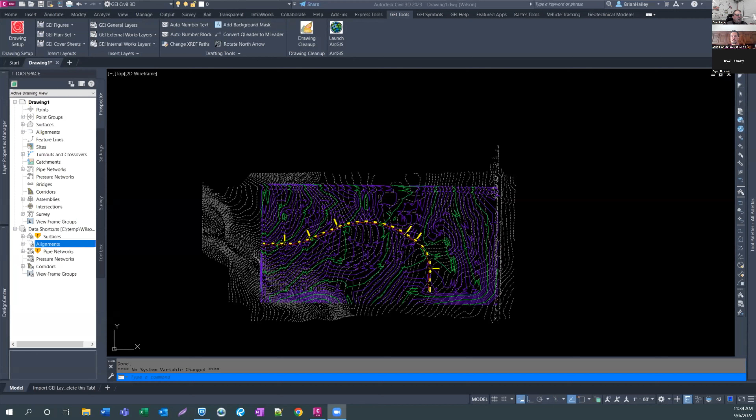Exactly. All right, so I'm going to start off doing a little tips and tricks type of thing, and this gives you an opportunity to post questions up so that we have something to answer. So here, this is kind of a combination AutoCAD and Civil 3D tip. As I'm working in this drawing, as I hold my mouse and it just sits still, I get this beautiful, fantastic pop-up right in the middle of my drawing that typically falls right on top of whatever thing I'm trying to look at.

So this is known as a rollover tooltip. I despise rollover tooltips, I really never use them. I don't know if anybody else tends to use them, but they just take up a lot of space and show up on top of my drawing, and it's annoying. So that's one of the things that'll pop up on top of your drawing.

Another thing that'll pop up on top of your drawing is the Civil 3D tooltips. All right, why didn't you work? Come on, let's go. So if you're now on top of an object, you'll get the Civil 3D tooltip. This will give you things like the elevations of your surfaces, the station offset of alignments, or station elevations and profiles, things like that. I find this to be helpful sometimes, but not always. Another thing that will pop up is if you select something.

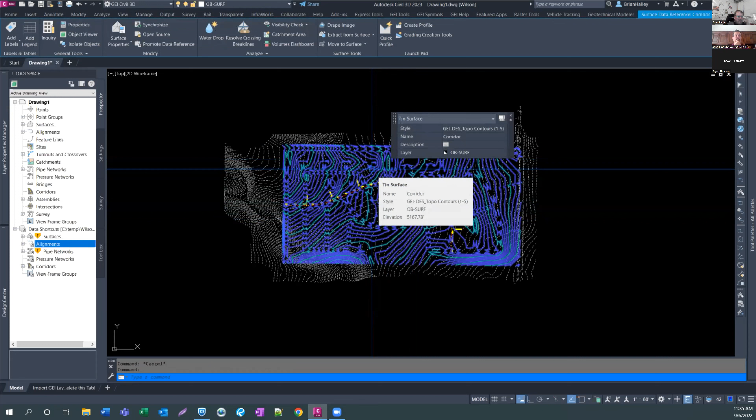You'll get your quick properties. I have a love-hate relationship with quick properties, I love and hate them at the same time. But I'm going to show you how to change some of these settings to hopefully make these a little bit more beneficial.

The last thing that tends to pop up is your dynamic input. If I start typing and type L for line, you can see this thing pops up in the middle of my screen. So I'm going to show you some things you can change to make these a little bit more useful and less annoying.

The first one is those rollover tooltips, this garbage here. I hate this, I hate it with a passion. I never ever want to see these things. They always pop up and they're always in the way.

If you go into your options, I just type OP for options, and of course it always shows up on my other screen, underneath all the Zoom stuff, because I only have one screen since my docking station is dead. Go to the display tab in your options, and you can turn off the rollover tooltips.

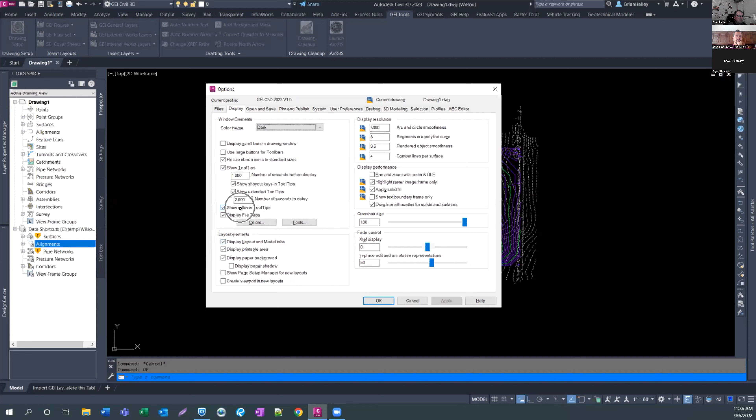I select OK, and now as I mouse over something, I don't get that AutoCAD rollover tooltip. I still get the Civil 3D stuff, which I think is good in some situations, but I don't have to deal with that big white box right in the middle of my screen constantly. So that's the AutoCAD rollover tooltips.

So let's talk about the Civil 3D tooltips now. How can you control the display of these? The nice thing is you can control them at several different levels. One, you can turn them off completely. Two, you can turn them off for all things of a certain type. Or three, you can turn them off for certain objects.

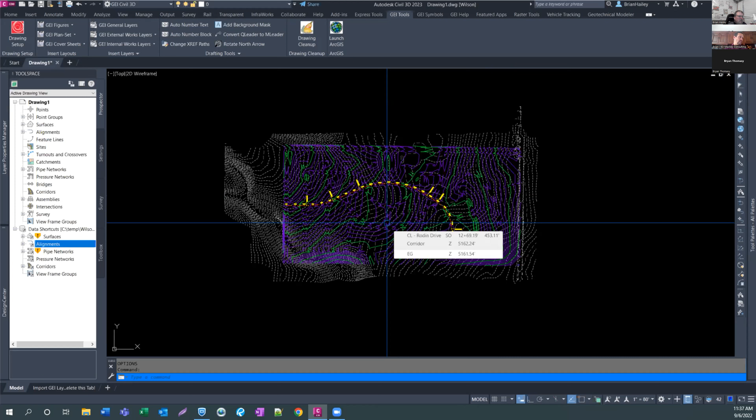Right now I've got two surfaces in here - that corridor surface and the existing ground surface. I'm not interested in any of the elevations for the existing ground, so I want to turn just those tooltips off. The way you do this is you go into the properties of that object - I select the object, then go into the surface properties, or alignment properties, or whatever properties it was.

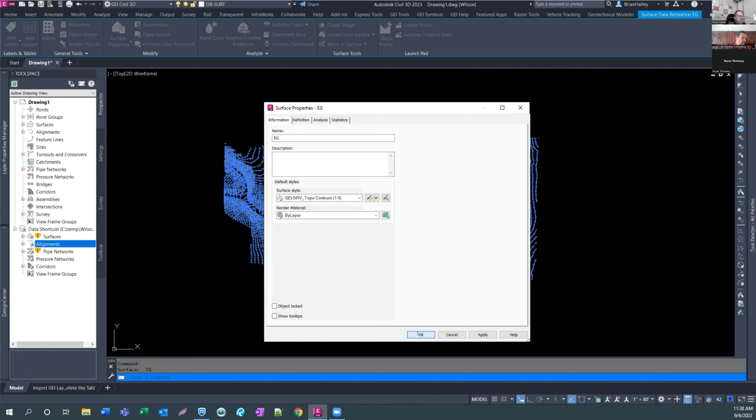On the information tab down at the bottom, you can simply uncheck show tooltips. When I uncheck that, I now only get tooltips for the one surface and not the other. So you can do it individually for individual objects.

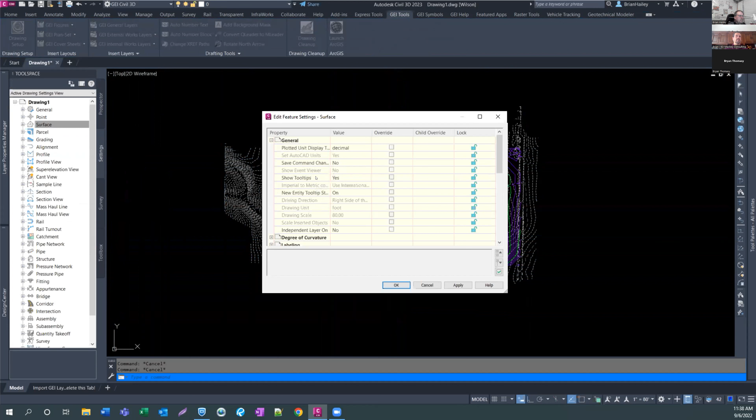You can also do it for all surfaces or all alignments, through the settings tab, right-clicking on the feature. In this case I'm going to do this for surfaces, so I'll right-click on surface and edit the feature settings - again this is under the settings tab. I'll pull this over, and I believe it's under general, if I remember correctly, show tooltips. I can go into my surface settings and say no, I don't want to see the tooltips.

Now, this is specific for this drawing, not a user setting like the rollover tooltips are in CAD - it's specific to this drawing. So if I choose OK now, you'll notice I don't get any tooltips at all.

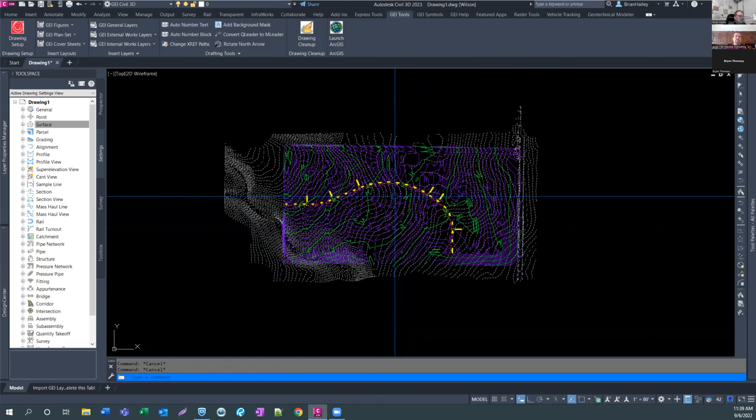Let's try that again - come on, I should at least be getting the alignments. Why am I not getting my alignments? Interesting. You had it for a split second there. Huh, I should still be - there it goes. I don't know why it was taking so long, but as you can see, I don't get any of the surfaces now, but I do still get the alignments.

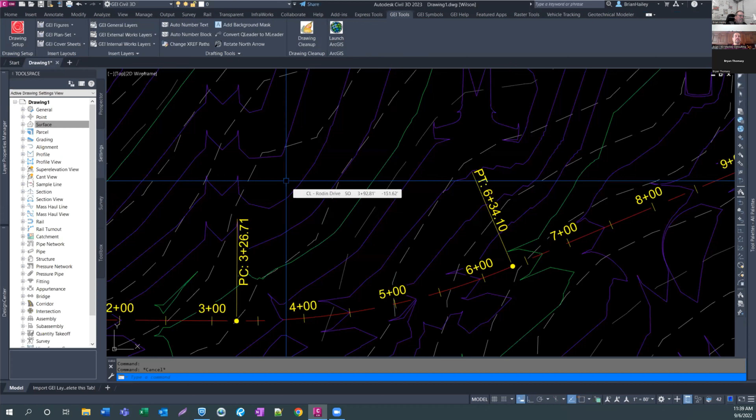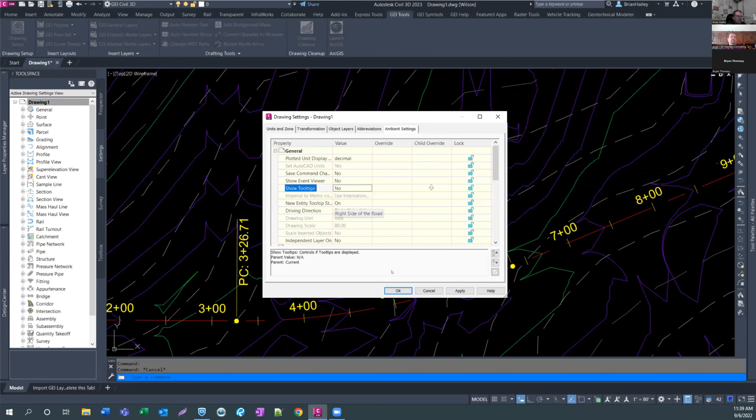Finally, you can turn it off for the entire drawing by right-clicking on the drawing name, edit drawing settings, and then on the ambient settings tab, you can expand out general and show tooltips. This will turn it off for everything in your drawing - you will never see another tooltip in Civil 3D again. So I'm not going to see any surfaces, alignments, profiles, nothing.

Is that for Civil 3D or just for this drawing? That's just for this drawing - this is the drawing settings, so it's specific to this drawing, and it's not specific to the user.

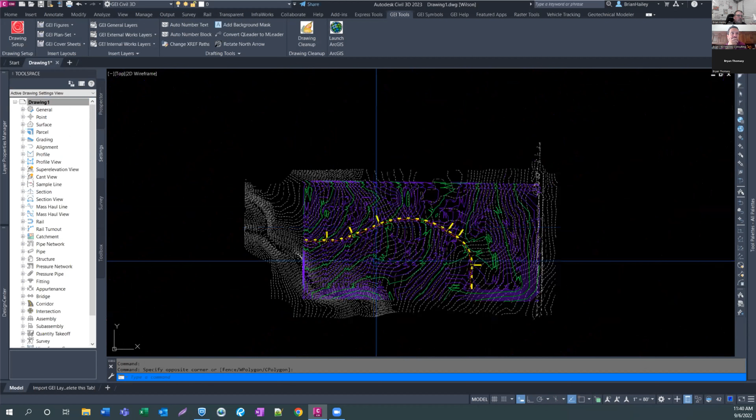It's specific to the drawing, so nobody will see them in this drawing. That's something to be aware of when you go in and change those things.

All right, so that's the rollover tooltips. That's the Civil 3D tooltips.

Let's talk about the quick properties now. So if I select something, I get this big thing that pops up. Now, when quick properties first came out, I was like, oh, this thing is evil. And I'm sure there's a lot of people out there that would think the same thing.

I'm guessing, Brian, you're not a big fan of the quick properties, right? Assuming you're talking the other Brian, despise, loathe, and hate are three of the words that come up with the quick properties. That and running O snaps, but I'll just leave myself out of this.

I'm not, I hate the way they work this way, but I think the quick properties are very beneficial. The thing I hate about them is when I pick on them, they always pop up right there in the middle of the screen.

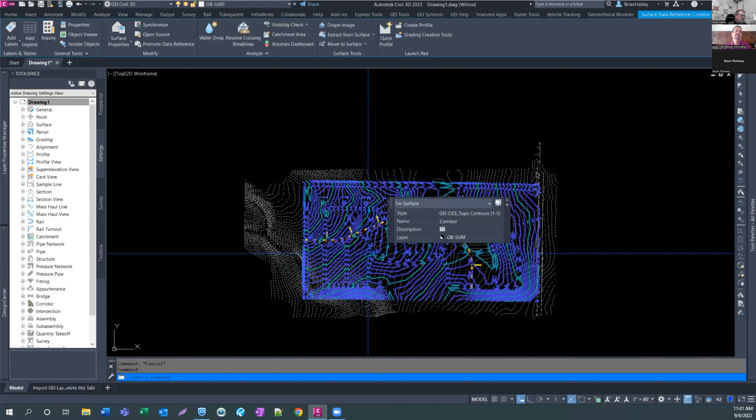Now I can move them out of the way. Let me go ahead and put them over there. But when I pick something again, it's back in the middle of my screen.

However, we can change that behavior. So just below the little X on your quick properties, you can go under the options for your quick properties. And in your options, you can go to location mode and make it static. So now when I move this up here to the top left of my drawing area, the next time I pick something, it's still up there at the top left of my drawing area.

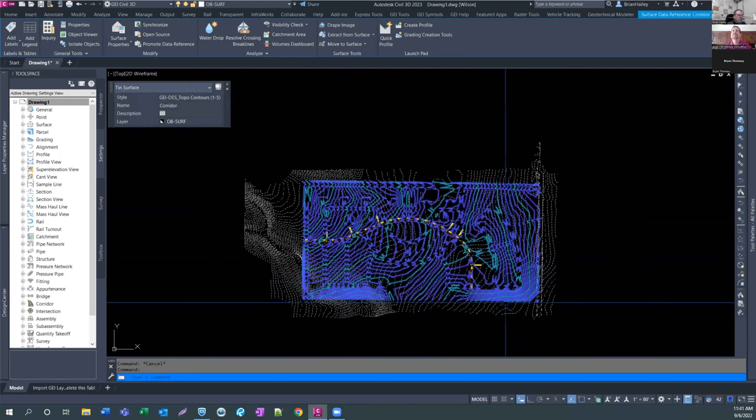So no matter what I pick, it's going to be up there in the top left, and I can change those properties. Another nice thing about the quick properties is you can control what properties are being displayed. So if I just draw, say for example, a line here, and I select it, in my quick properties I can hit the options again and customize it.

For all these different things, I bet it's going to show up on my... oh, it showed up here. Cool. So for my line, here are all the properties I can display. Maybe I'm really interested in the starting and ending elevations for my lines, so I can toggle on the start Z and the end Z values.

Apparently I can't do that because that's the enterprise CUI that I was trying to edit.

I, as a person who imports in spaghetti drawings from civil engineers all the time, I wish quick properties with the Z elevation would be there for every single one of the files you guys put out. Yeah, then maybe I wouldn't get such spaghetti drawings.

So apparently it's not going to work because this is under my partial. Do I have it under here as well? If I go into my custom, see, I should have tested that before. Okay, so if you're not using an enterprise CUI, you should be able to edit that and change what properties you see up there. But at least it's out of the way now, so got that going for us, which is cool.

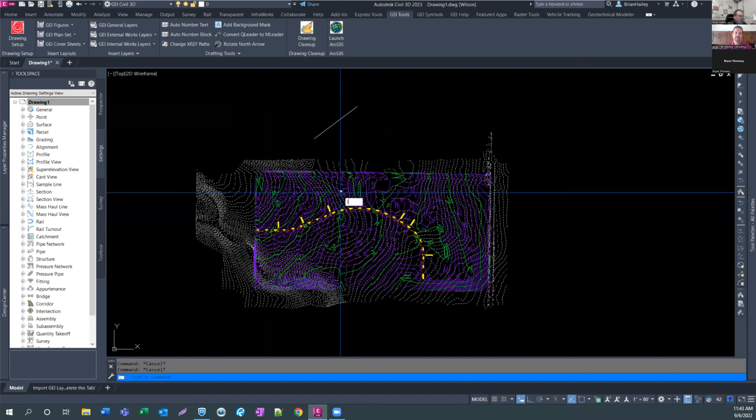I left it on for at least 5 minutes before I started Googling on how to turn this stupid thing off. The problem I had is if I had my cursor up here in the top right of my drawing, and as I'm moving my mouse towards the bottom left, because that's where I need to go draw something, as I'm moving the cursor, as I type, my cursor froze and would freeze right there.

And now I'm thinking, okay, did I type this correctly or not? And this was before the autocomplete thing, right? So I'd have to go search my screen for where my cursor was when I stopped typing. And if you're in a busy drawing, it could be difficult to find.

So what we can do is go into your drafting settings, DS for drafting settings, and we have the dynamic input tab. One thing I always like to do is change it so that the input is down at the command line, so show command prompting and command input near the crosshair.

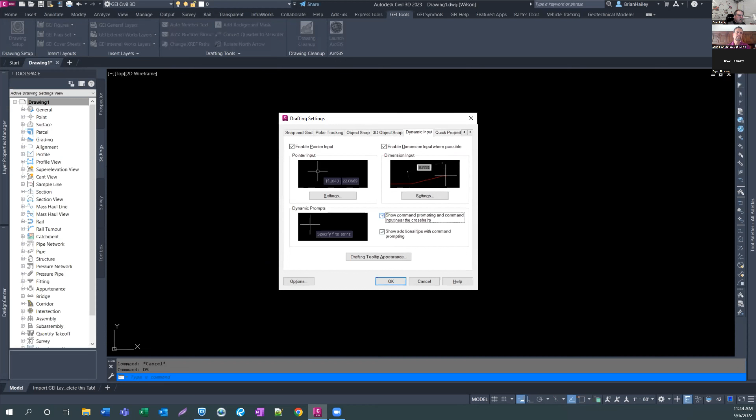So I'm going to uncheck that, select OK. And now as I move my mouse and I type L, it's showing up down there at the command line, the way God intended it to be, right?

So now I can type line down there and it's showing up at the command line. I'm not getting the prompts near my cursor. So that was one of the things I always despised about the dynamic input, but being able to make that change, I found I really do like the dynamic input. I didn't intend for that to happen.

What's that? You said God intended. I didn't intend for it. You didn't intend for it.

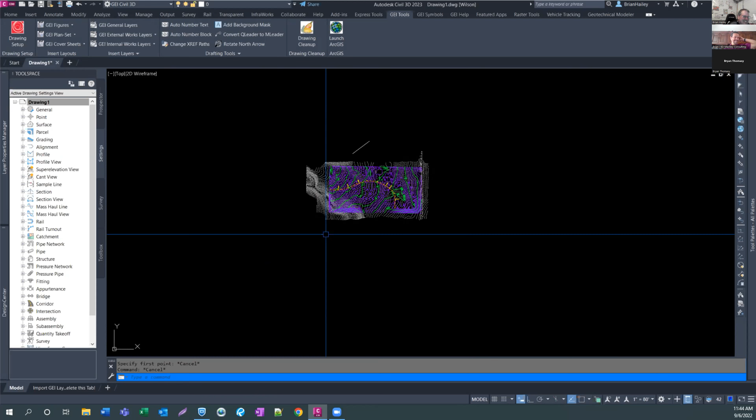So if you're not using your dynamic input, I would recommend trying it again with that setting changed, because that's the primary reason I see most people try to turn it off. But being able to select this and just type in, tabbing over to the total distance and changing that to 1,000 and just seeing your line change is really great. Being able to mouse over the grip of a line and seeing all that information, I really enjoy that.

Another thing I just thought of, I wasn't planning on talking about it, is the multifunction grips. So let me draw a polyline here because that'll show up a little bit better. If I mouse over this, I get the stretch vertex, add vertex, remove vertex, and so you can come down here and choose these different options.

But did you know that if you select the grip, that will take you into the first of your multifunction grip options. And if you hit the control key, it'll cycle you through those options. So now I'm adding a vertex. I hit control again, I'm now removing the vertex. I hit control again, it takes me back to the beginning where I'm stretching.

Same thing if I go over the arc. If I grab it, or the line, I grab it, I'm stretching it. I hit control, I'm adding a vertex. I hit control again, I'm converting it into an arc. I hit control again, and I'm back to stretching the line.

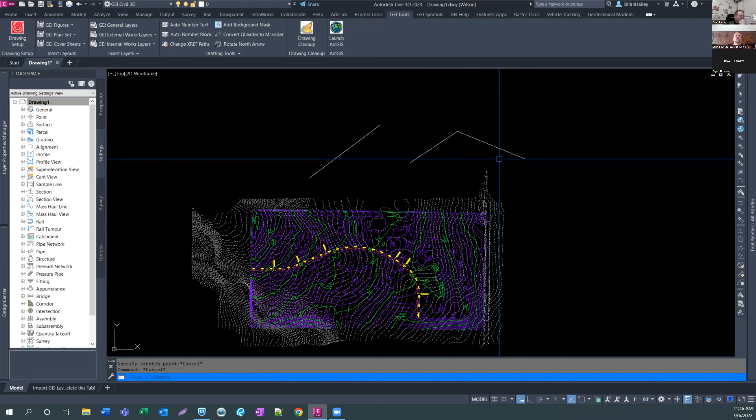So if you are really familiar with the way multifunction grips work, you can actually go in and turn off the display of the multifunction grips on your lines. Because if you have a drawing full of polylines that have contours on it, what happens all the time is you go in and grab an object and your mouse ends up on top of it and you go, hey, I want to erase it. Oops, I moved my mouse.

Your mouse ends up on top of it and you go E for erase and you hit enter. Well, it says, hey, there is no multifunction grip option that starts with E. And so it doesn't erase it. Even though I didn't select the grip because my mouse was over it, it popped that up.

And that is, where is that setting? Is it in your options, or is it in the drafting settings? I think it's in the options. Do you remember where this one is, Brian? No, actually, I have not utilized that.

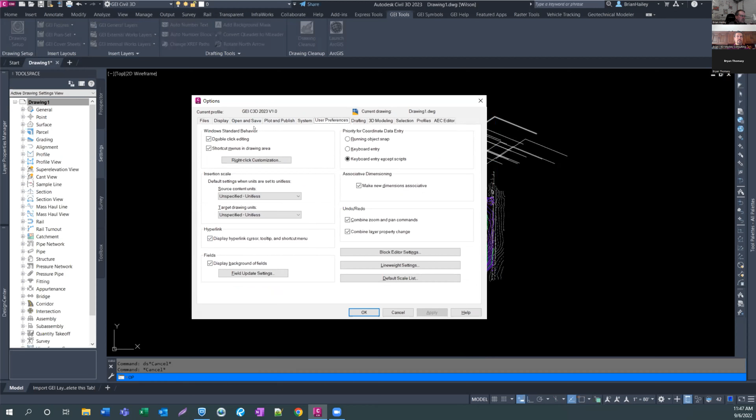I've been plagued with that for an eternity, in the fact that I constantly do that to erase, and it's actually hovering over. User preferences. If any place I would think would be under selection, perhaps, but that's just me. To be able to denote what it is selected. Under grips, show dynamic grip menu.

There it is, I bet that's it. So now when I mouse over it, I don't get the grip, but if I select it and do my control, I still get the options for the dynamic, or the multifunction grips.

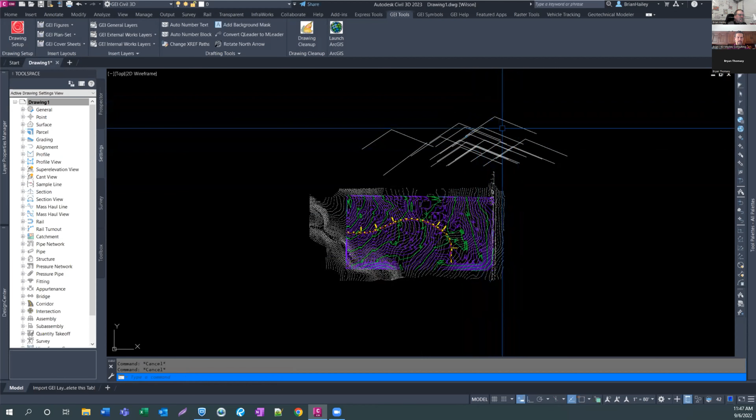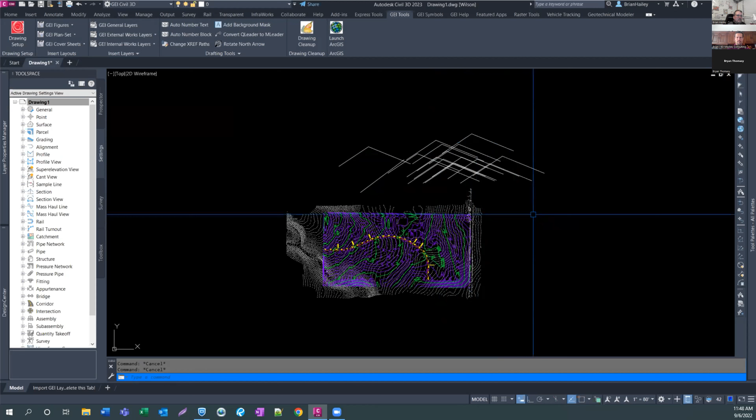I did not know you could do the control. That is fantastic. I did know that you could do the tab, so that way you could tabulate through if you're stretching, rotating, scaling, or moving. So the space, yeah excuse me. Yep, yeah, that's cool too. Learn something every day. Yeah. And if you're not careful.

So that's kind of all the introductory stuff I had. So that took up about 15 minutes or so. Do we have any questions?

Well, I can save Tom's comment, but that'll probably end up being a nice big argument with everybody about how they hate that feature. So we'll go to Charlie's question first. Charlie's question was, is there a better way than using tooltips to check the elevation on surfaces, stations, etc., alignments, profiles, all that fun stuff?

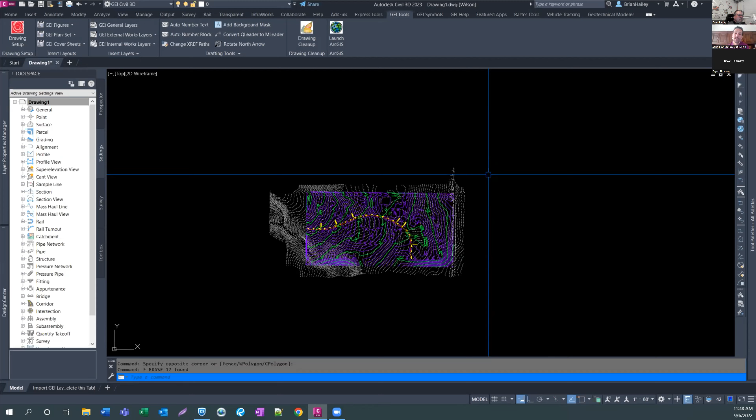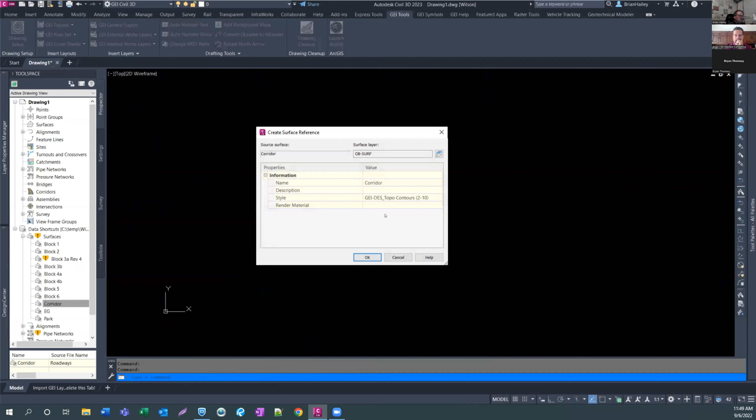So there's a couple of ways. One is the tooltips. Let me... that was too far back. I just undid everything, I shouldn't have done that. Let me bring my surfaces back in. It was the corridor surface and the existing ground. And I'll grab an alignment, we'll do that same one.

All right, so I didn't deal with styles and whatnot. So one is the tooltips. If I just hold my mouse, it shows me the station elevation or the station offset for an alignment. It would do station elevation in a profile view, elevations of surface. That's the way I would do it, especially if you turn off those rollover tooltips, and that way it doesn't suppress this.

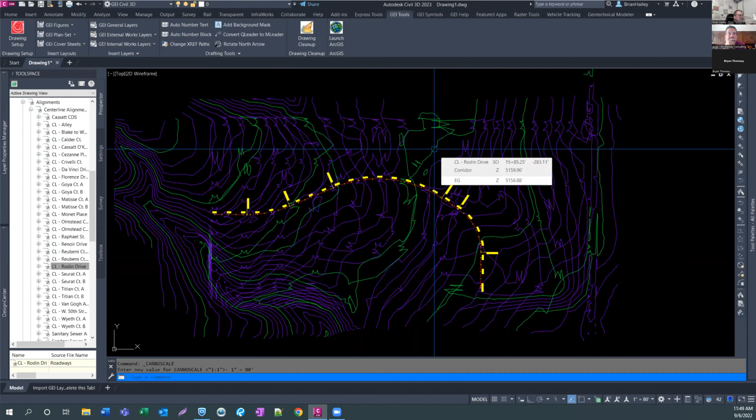Another thing you could do is if you go to the Analyze tab, over towards the right, we have the Inquiry tool. This will bring up a nice little palette for you. Of course, it's up on my other screen, just like everything else.

I'm sure I've told this tip before. If you're trying to get a palette to go on top of another palette, hold the control key and it prevents it from docking temporarily. Or if you never want it to dock, go into the properties and uncheck allow docking, and then it just won't. So, not holding the control key now.

Anyways, so we got all sorts of different types of things. If you're looking for the station offset of an alignment, you can go to Alignment, Station Offset. Let me make this a little bit bigger. All right, Alignment, Station, and Offset at Point. It's going to ask for the point, so I can just click this little button here, pick a point, and it tells me all that information.

All right, you can do the same thing for a surface. If I go to Surface Elevation and Grade at Point, again I select the surface - I'll do it for the existing ground. And then I pick the point and it tells me what the elevation is there, and it gives all sorts of great information as well. So those are some other tools that you have.

The third method that I have is simply throwing a label in.

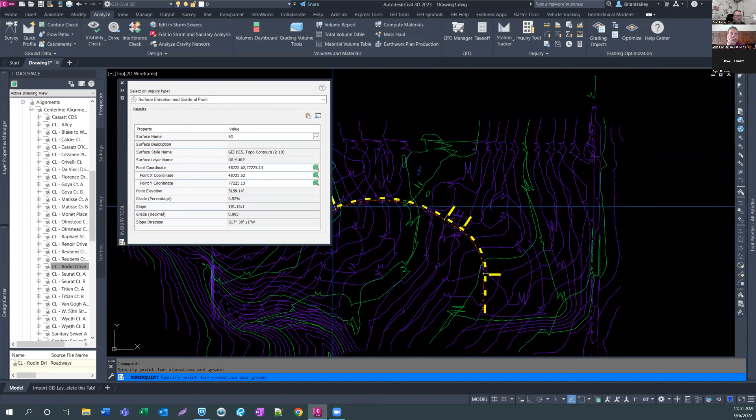So yeah, Charlie, getting the exact station, this would be the tool for doing that. He wants to be able to just pick a point on the alignment and get the exact station. Yeah, so you would come in here to Alignment, Station, Offset at Point, and then I'm going to use the nearest snap. Nearest snap, and it gives me the exact station for it.

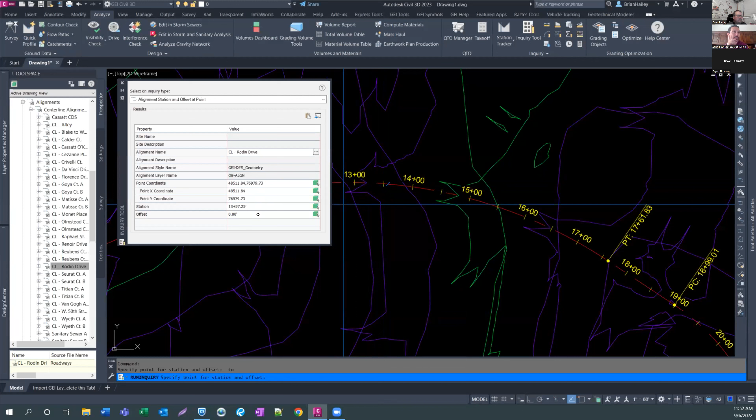But nothing in a sort of tooltip kind of scenario - you have to go into your settings there. No, unless you were to do something like draw a circle at that location that you could then get a grip to. It doesn't even look like it because it's over a grip - it's not giving me the Civil 3D tooltips.

This is what you gave him - he loves it. So that's one step. You know, there's things like that always drive me crazy. It's like you're giving me all this pointless information on a pop-up screen, but the stuff I truly want, I can't get on a pop-up screen. Right.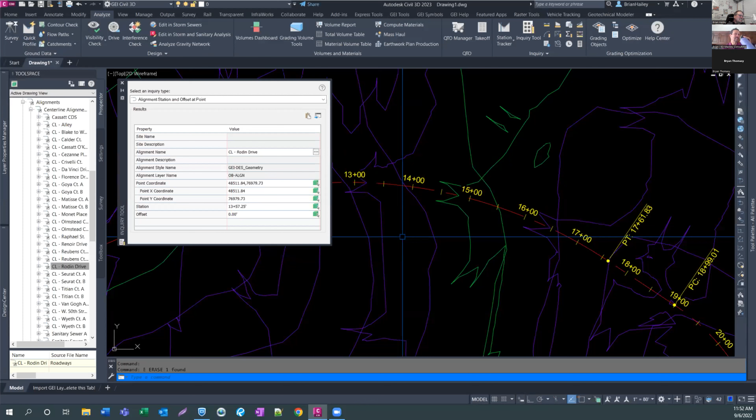You know, I'm buying time here because Charlie is the only one partaking in today's session of Civil Chat. Yeah, come on people, we need some questions. But I got a question. Or should I type it in?

I mean, let the bantering begin. You guys may have covered this, but you know where you've got Drawing One, and if I hover over the tab up top, it shows me a preview of my Drawing One. How many times have you guys gotten it pulled? You got maybe 3 or 4 drawings open, even though you shouldn't. I try to tell people not to have 4 or 5 drawings open, but it shows me multiple layouts and all those drawings, and it's a pain in the butt because all of a sudden it'll shift between, and it's got to regen, and then I got to wait there 5 minutes, and the person's right behind me, and the client wants it now. Is there a way to shut that off? I'm leading the question because I know there's a way to shut it off, but I figured there's got to be help a brother out. I know there's a way to shut it off because I've seen Brian Hailey talk about this, because it drives him crazy too.

So you're talking about if I mouse over the drawing name, I get the file tab previews down here, and if I mouse over it, it actually changes the display in my drawing. Yeah, and if I've got like 4 or 5 of them, it takes a regen time and you don't get this stuff. You don't want to go to the tab, I just want to go to the drawing.

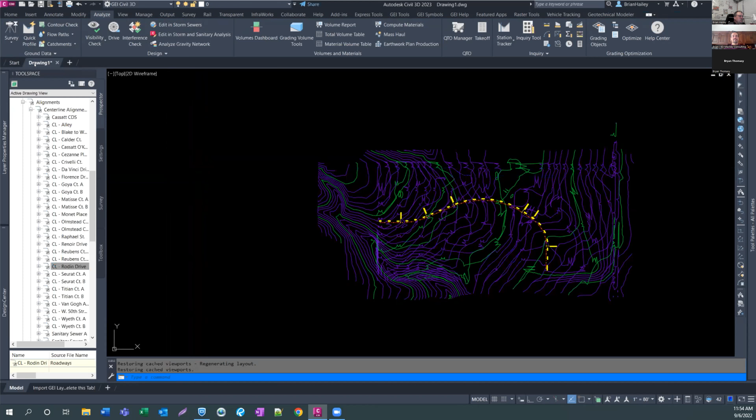Yeah, so there's a couple of different things you can do. One, you can just turn them off altogether, or two, you can turn off the option for the switching. Can you show me both by chance? I can show you one, I can't remember the other one off the top of my head.

Right, so this little switching thing - I actually kind of like seeing the tabs. So when I hover over it, I see the tabs, but I just don't want the drawing to change every time I mouse over one. So that is the thumb - let's see if I can remember what it is. Thumb hover, file tab thumb hover. Oh, that's an intuitive command. Yes it is. So you just type thumb hover, the autocomplete should kick in, and you set that to 0. Now when I mouse over that, I still get the preview, but it doesn't do that automatic switching for me.

So this is the way I would have my system set up in my ideal world. I like it this way, and then if I need to, I can always click on it and it will take me to that tab of that drawing. The other option is to turn off the display of that altogether.

And I don't remember what the command is off the top of my head, but I have a feeling somebody here does. I think it starts with file tab preview - is that what it is? Yep, and Nathan agrees with that. File tab preview - it doesn't just start with it, that is the entire thing. So if you set that to 0,

Then you don't get the preview at all. No, but you get the pull downs, which is kind of nice because it doesn't take up my graphics card issue.

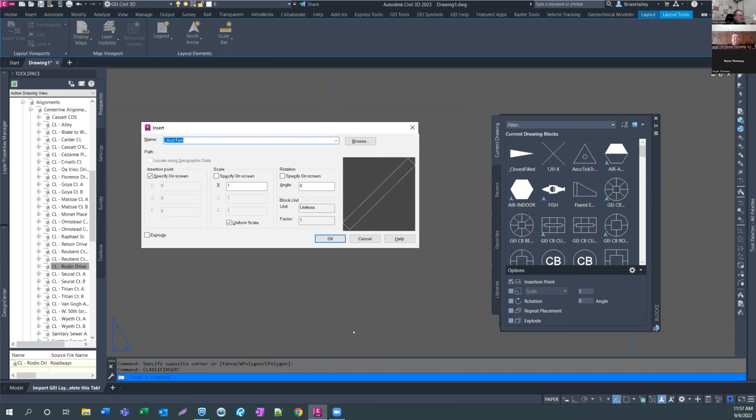Thank you, Raphael. So what you can do if you're so inclined, and I did this on my system prior to upgrading to 2023, is you can go into your alias edit - I always like to type things, alias edit. It's one of your Express tools, so if you go to Express tools, command aliases, it does the same thing as typing alias edit. You can add an alias - I click on add, of course it pops up on my other screen, and have that be your DD insert or your classic insert.

Yeah, the only problem is insert - those of us that are CAD managers, you're looking at multiple people trying to get to this thing, right? Yeah, and this is for the individual people, right? Yeah, right? No, that's so great, you can change it.

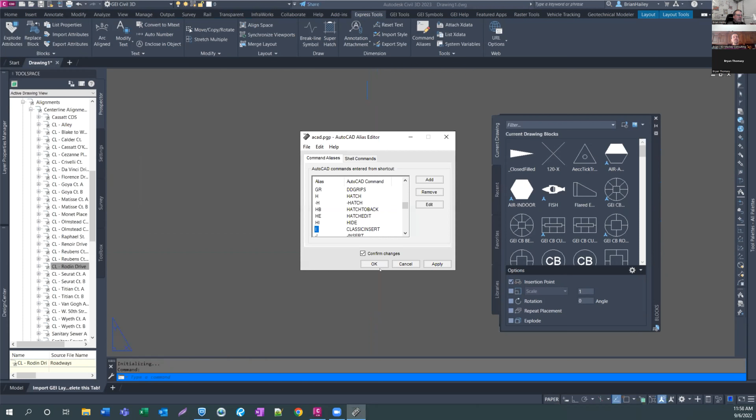Yeah, but then the problem is you change that on your machine, you get support from your CAD manager, and they're like, 'What the heck is this dialogue?' Well, you can always just type insert. I'm not looking for the old guy freaking command. You can always type insert, but then you get the old on the other screen.

All right, and I did see a pop-up about the extend and trim. Yes, I always change mine back to classic mode too. Oh my gosh.

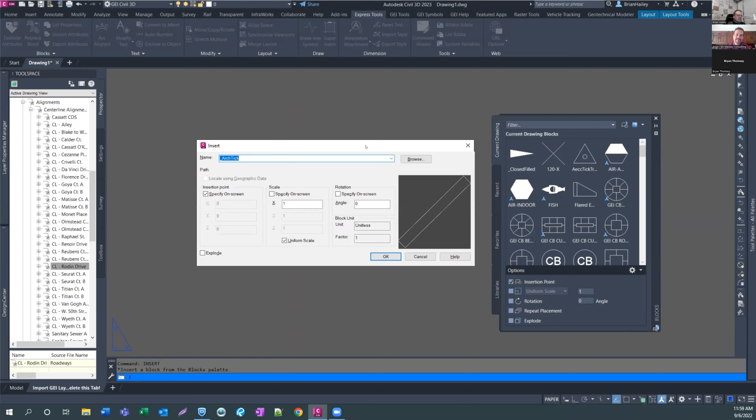Yeah, it was one thing that drove me crazy, and I always preach this in the Revit world when I'm doing trainings: don't change any of the out of the box shortcuts. Because I'd go to people's machines and try to type L for line, and they're like, 'Oh no, I changed that to be A.' What? Yeah. Oh, I changed that to be XYZ. What? Why? It's the trim command. Why is it XYZ? Oh, because it just flowed better on my fingers.

What? Yeah. Now, Mr. Mackey, I'm sure you're going to kill me, but I have changed my Revit to look like AutoCAD, meaning I have changed the background to black. I have brought in all the basic M commands, insert commands, and rewrote them. But yeah, don't hate me.

No, the biggest reason I tell people, and I've had in my years of Revit, is when you make it look like AutoCAD, you think like AutoCAD. Therefore you fail, if you're fortunate you can differentiate between the two. But in general, I have found, and that's literally why the Charles River software, when they did it, they said, 'Hey, we're going to make this black and white, so it's not AutoCAD,' and your brain makes that switch.

No, makes no sense. I agree with it 100%. I did fall upon an individual that had it turn black, and I'm like, oh yeah, don't do that. And Tom agrees with me, he's like yeah, changing the out of the box aliases, don't do that. Yep, add additional ones, whatever you want.

But yep, it's the same thing for me in the Revit world. I get people doing the same thing all the time. I go to somebody's machine and it's like, oh, DI is not dimension anymore. No, I made that D or whatever. It's just like, oh my God. And there is no typing of a command in Revit. And there's a lot of people in Revit who don't know where the buttons are. So they literally could not tell you, if they don't have their own personal key shortcuts, how the hell to get to that command. Yeah, wow.

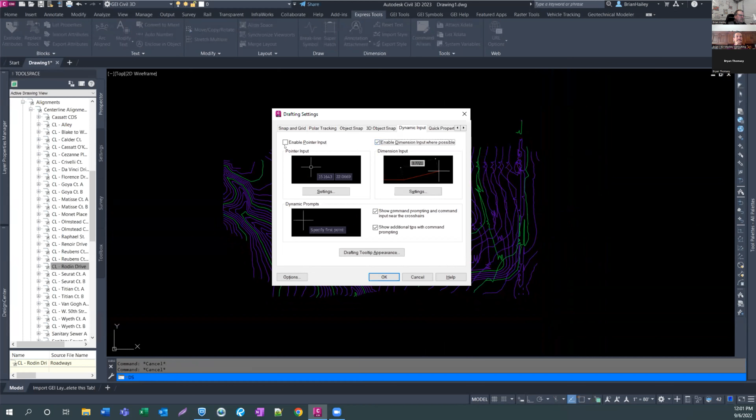There we go. When I'm presenting, right? So if I type blip mode and I hit enter, it's an unknown command. It's an old AutoCAD command that has been undefined. But if I type dot blip mode, it actually recognizes the command and I can turn it on, right? So you may be wondering what blip mode is, but if I pick on the screen, you can see it leaves behind little blips. And then you have to regenerate to get rid of them.

Oh, you don't have to regenerate, you just pan or zoom. Oh, just pan. But they're just annoying. Oh, back when I was using them, you had to regenerate. Yeah, you couldn't, back in the day, yeah.

AutoCAD 14, not 2014. RE - when they came out to Windows from DOS, you could actually hit F5 instead of typing RE to regenerate. But if a command is undefined or redefined to be something else - for example, I knew one company that redefined the line command to draw polylines.

So you can redefine line, or undefine line and create an alias for line to be a polyline. You can always type dot-line to go back to the core way it's defined in the program and still run it. If I undefine line and type line now, it says 'line type manager' because it auto-completed, but just line all by itself is an unknown command.

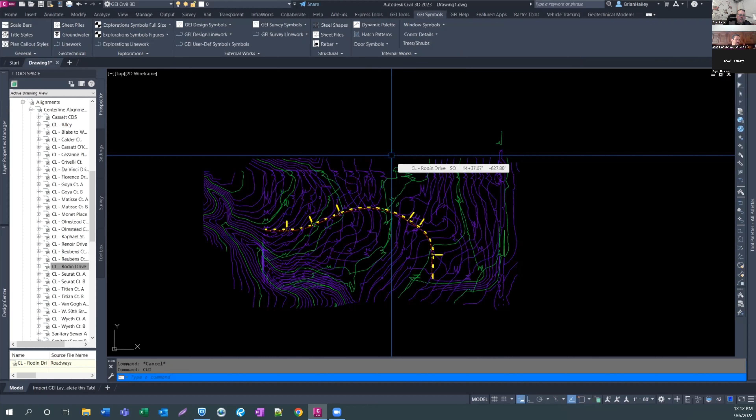So I want to address some of the comments in the chat there. Tom had said he's heard of techs that are that way, they ask where the draw property line tool is. So we've got that exact same thing here.

If I come up here to GEI design line, utility line work, I can draw a communication cable TV line and it just draws it for you, so you don't even have to. This is the kind of thing I was talking about, it's customized so you can do that, but then what's the process for doing that if you don't have the tools? Is it keeping the users at a disadvantage when they go to other companies?

Charlie mentions that he doesn't have a good understanding of how the layout tabs work because we've automated that whole thing. If you need a new layout tab, you just go to the GEI tools, plan set, standard layouts, move it over onto the screen that everybody else can see, pick the one you want, and it's done.

What I also find, Brian, is sometimes there are individuals that, like in a case where you're the CAD manager on this particular portion, you've got the CATV, but somebody needs a new overhead telephone electrical line that's 25,000 kV. And that line type's not in your library and you're off on vacation. Oh no, what do I do?

Right, and those are the situations that I kind of think of in the back of my head as a bottleneck type of scenario. Because that's very similar to what we have with our standards at our company, and the fact that they start picking and pulling, but when the automation becomes too elaborate, we become a bottleneck as well.

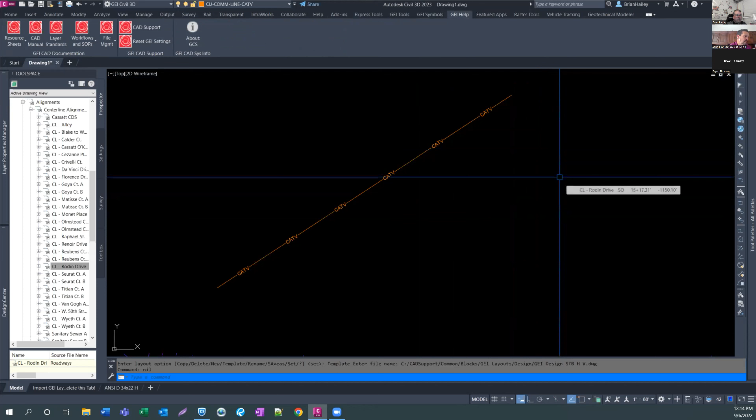Right, yeah. And Ish mentioned to just distinguish which ones are stock CAD and which ones aren't. I think here at GEI we have that pretty much wrapped up, because all of our custom stuff is in these GEI tabs, everything else is stock. So that's a great point, Ish.

Thanks for pointing that out. I love that. I think we do that here at GEI, but if we weren't doing that, I would definitely want to do that.

And it also makes upgrading to the next year easy, because I don't have to go in and change the insert tab to include the GEI stuff, since I've got all my GEI stuff just right here.

Yeah, but it is a fine line, and there's always a fine line on that too, especially with younger people coming up. How many of you guys have ever actually been there when somebody's like, 'Oh, I need AutoCAD installed'? You're like, okay, that's going to be about an hour. There's not just an app store for me to go browse and search and install real quick like on my phone. I've had a lot of clients who need this and they don't understand.

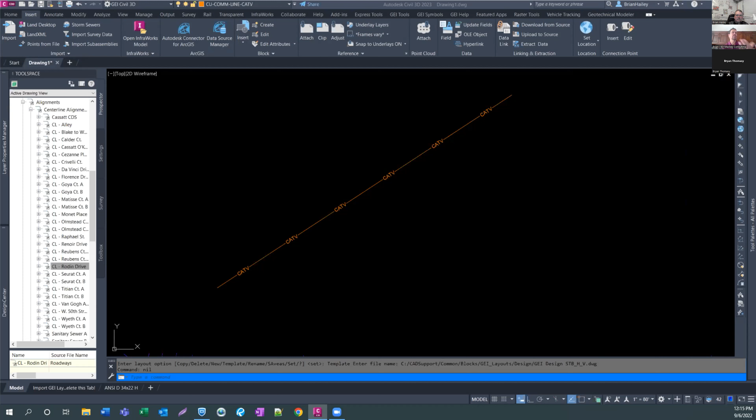So the younger generation, everything is so easy for them. You start running into this thing of the Macs being that way too. Mac takes control of a lot of things on your computer, and obviously all of our phones and tablets too. You just don't know what's going on in the background on any of those mobile devices. So it's this fine line of, do we do the same thing in this software world, or are we trying to pull back on something like that? I don't know if I have the answer, but yeah, it's weird.

So we have one question. Y'all are slacking today. What are you tired from the long weekend or something? They're just all enjoying your beautiful tips on how to get the annoying stuff off your screen.

Danny asks, how do you have it load company Lisp in 2023? I have it working in 2021, but not in 2023.

You want to take this one, Brian? You're talking to me? Yeah. Well, he's surely not talking to me. I'm not talking to Maggie, that's for sure.

Let me peruse the question. If you have load, I'm a little confused in the fact that I would be doing it. I've done it the same way in 2021 as I've done it in 2023.

Okay, so let's ask it this way, Brian. If you have a company specific Lisp routine, and you want it to load on everybody's machine, how would you go about doing that?

Well, okay, share your screen? I can definitely attempt to do that. Let me go ahead and share my screen. Hopefully I don't leave by accident. There it is, there's share my screen.

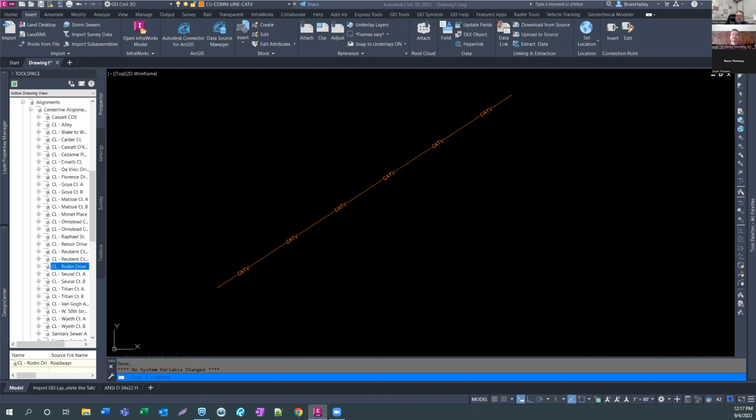Okay, so let's see, did it say I can't? You cannot share your screen while another participant is sharing. Oh, stop sharing. I've also wanted to know on Zoom, why did they put the answer and the hang up button right next to each other? Share my screen is next to hang up, and I go to share my screen and I hang up. I mean, I know I'm old and blind in one eye, but come on, those buttons should not be next to each other.

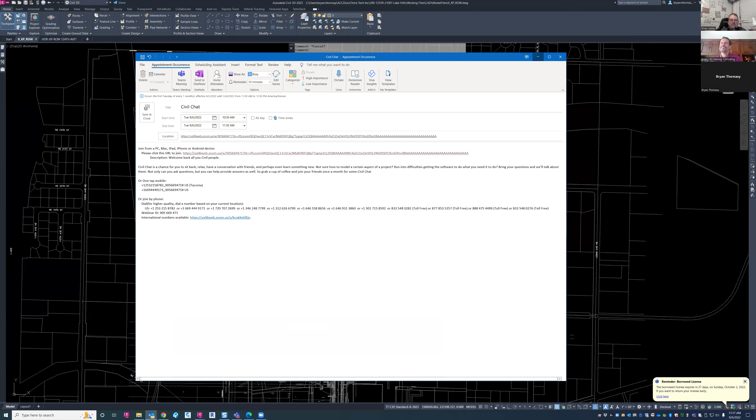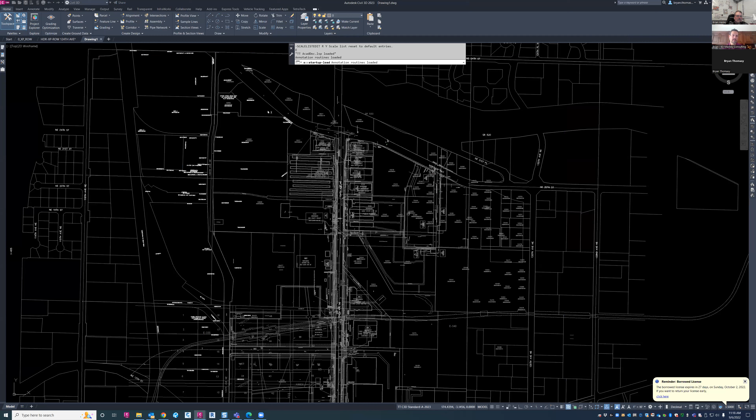Okay, so ignore what you're seeing on my screen. What I will do is start a brand new one. So the way here at Tetra Tech we do our items is I create, as a CAD manager, an argument file and an icon.

And I'm in charge of the argument file. So within the options, we have profiles, and in our profiles, I generate an argument file. This argument file takes care of all of my support file search paths, all of my tool template settings, all of my tool palette locations, and everything like that.

That argument file is then stored in the cloud, and we have cannibalized the A drive. Anybody know what the A drive is? Anybody remember what the A drive used to be? A 3.5 floppy disk. Well, they no longer have them, nor do they have CDs anymore on these new computers.

So what we've done here at Tetra Tech is we have generated a SharePoint site that we keep all of our standards on, and this is a one-way path. So we have them synchronize the items. This is very long-winded, my apologies, but from a CAD manager standpoint, this is the fastest I've found to be able to do it across multiple offices, so everybody's on the same page.

But we have them synchronize the folder to their hard drive. When it synchronizes to the hard drive, we keep it via OneDrive. They keep it on their hard drive, so that way, whether it's desktop or laptop, you've always got your standards with you. And yes, I'm an old batch file type of guy.

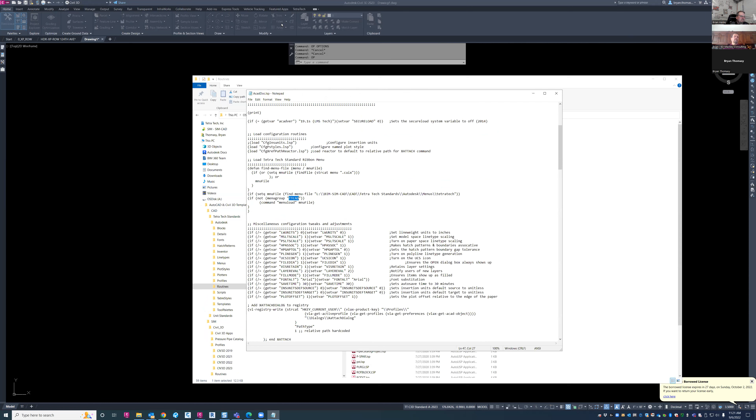So right there, you can see it's using the TTC3D standard, and away it goes. Within here, it looks, because in the hierarchy of the support file management, it looks to this routines folder the very first time. In this routines folder, there's an acaddoc.lsp, and in here we have all of our standard setup, and it starts loading all of our typical commands for our menu pull downs that you'll see up above.

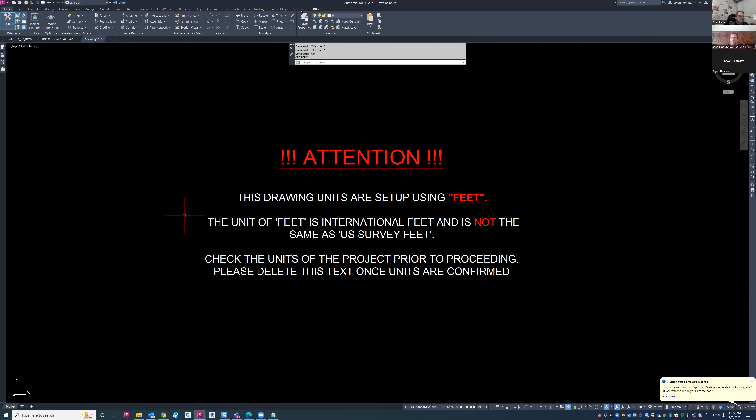Let me see, can I move that? I can move that. So we have our Tetra Tech area here, looks like a GEI or whatever your place is called. We have our layers, our line types and such. We have our title blocks and borders, and we capitalize on using a design center to implement all of our standard layers and such.

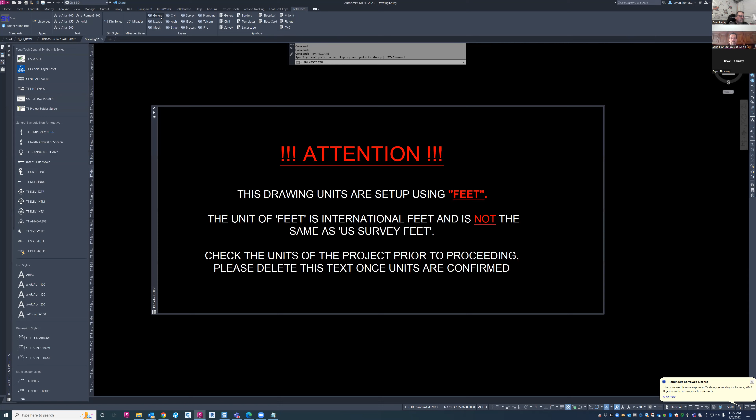So when you click on it, it just brings up the design standard, and you can come in here and grab the dim styles or whatever you need for what you got. And that'll load the primary lists, and that's how I bring everything forward.

So for a new user, it's a 30-second item where they import the profile and bring in the icon, and these will all show up. So there's a lot of magic that happens behind the scenes, but I don't know, man, that might have probably went too far into it. My apologies.

That's okay. But I was thinking about just talking about the ACAD.lisp or the ACAD doc.lisp. Yeah, the ACAD doc.lisp, it'll come in. So we have it set up our LT scale, PSLT scale, all of these guys. And then at the end, because... so why don't you talk about what the ACAD doc.lisp is?

Oh, my apologies. Okay, so the ACAD doc.lisp is basically the first Lisp that AutoCAD looks for your standardization or for loading of your files. Now, Brian, I need you to correct me on this, because I'm not doing it from a teacher standpoint. I'm doing it from an individual that has just been in the game.

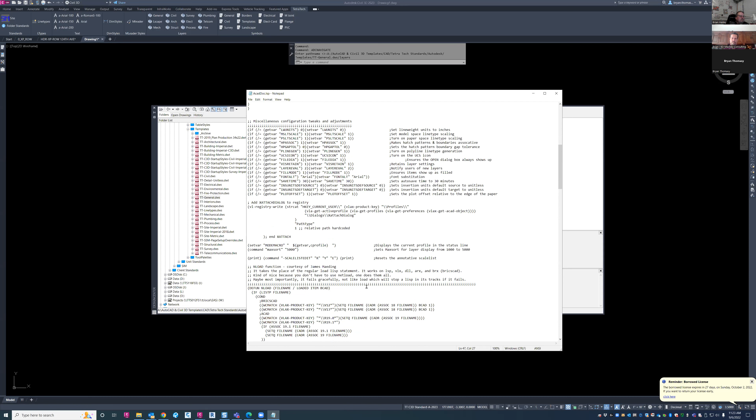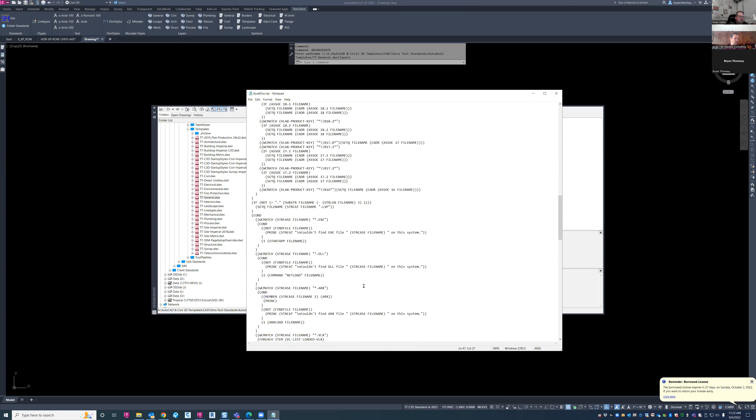So basically the ACAD doc Lisp is a Lisp routine that is loaded into every single drawing that is launched. As soon as you open up a drawing, it runs this Lisp routine. And there is one with every install of AutoCAD, and we redirect to this location to launch ours.

Now, this looks very complicated, but it's not. It does simple things like the sheet set manager status, it sets it to 0. The auto open sets it off. Here's another one, field eval, we set it to 29.

And then you can go out and tell it to look for other AutoCAD Lisps. This is the key portion, because not only is this the main Lisp that it loads, then it loads our company Lisp. And then if it has it loaded, we have what they call a local toolbox.

This is what we allow each person to modify themselves. So they can put this on their own machine, modify it, and that way they can load up their own Lisps, thus facilitating them changing whatever commands they want to.

I discourage changing the PGP file, because if you go to another version of AutoCAD, you've got to update your PGP or pull the PGP over. This is a similar item where you just bring in your local toolbox and take it over to a new known location, and it will just start pulling from it.

And it comes through and it loads the items automatically. Awesome.

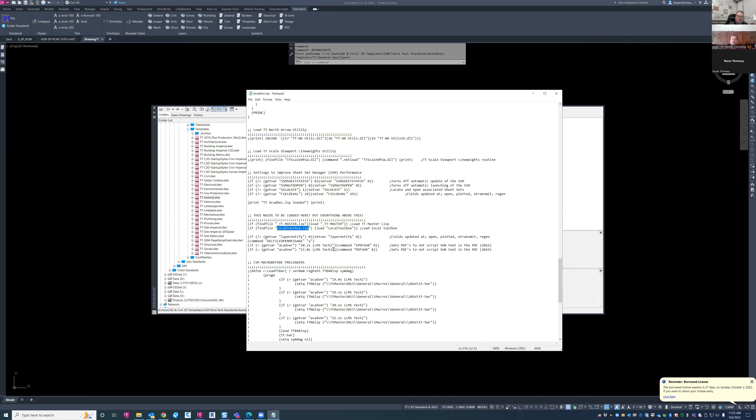All right, so hopefully that helped you, Danny. Yeah, that was a lot. Yeah, but sorry, I think it got to what you needed as well as putting it in the ACAD doc.lisp.

So if you have a company Lisp routine, just add it into the ACAD doc.lisp. And if you have multiple ACAD doc.lisp routines on your system, CAD will run the first one it finds in that search file path. So in your options, if you go to your file support, the first one it finds, that's the one it will run.

So I want to talk about Charlie's question. Charlie asks: what is your preferred method for adding segments to the end of an alignment? I typically just add fixed line segments one at a time. Is there a better way?

All right, let me go ahead and draw an alignment in here. Go to alignment creation tools. And you're not sharing. I'm not sharing. I should probably do that.

Thank you. I'm going to tag onto that question. Will this work for pipe alignments as well? Pressure pipe alignments too? It depends. If you're using the pipe runs, you just edit the pressure pipes and the alignment will change.

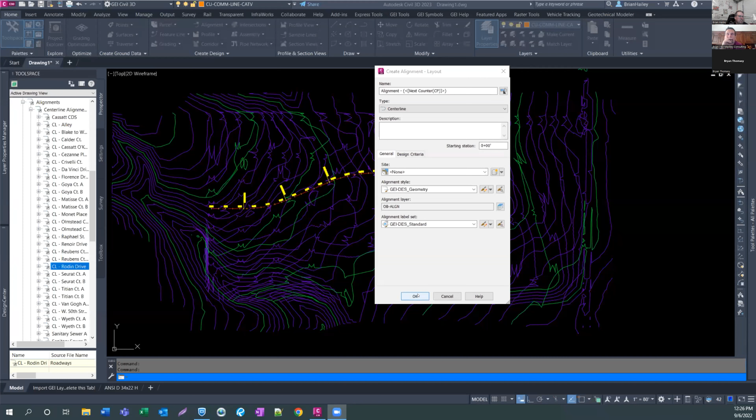Okay, all right, let's see. And then I bring over my tool. I'm going to do tangent with curves. I'll just kind of do it over here to the side. I'll throw a quick alignment in here.

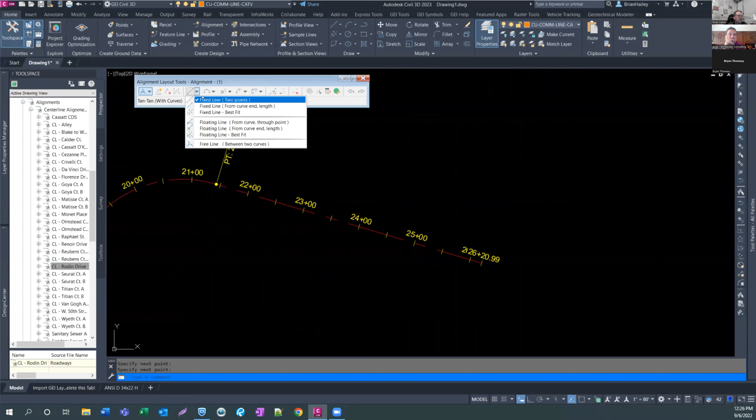Charlie, what you're asking is you need to add some more onto the end of it, and the way you're doing it is coming in here saying you want to do a fixed line. Then you'll snap to the endpoint here and go to there. And then you need to add another fixed line, right?

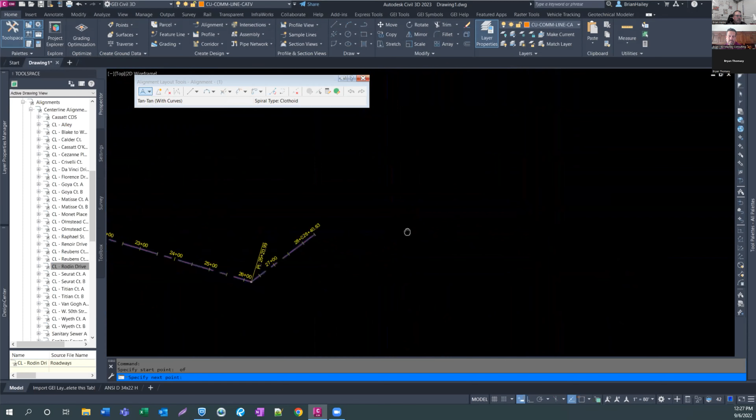Yeah, you don't have to do that. You can actually just use these commands again. So I can come in here and choose tangent with curves, snap to that endpoint, and you can see it's actually filleting a curve between the new line segment and the previous one. You can continue to draw alignment using that same command as long as the alignment segments are continuing to go the same direction.

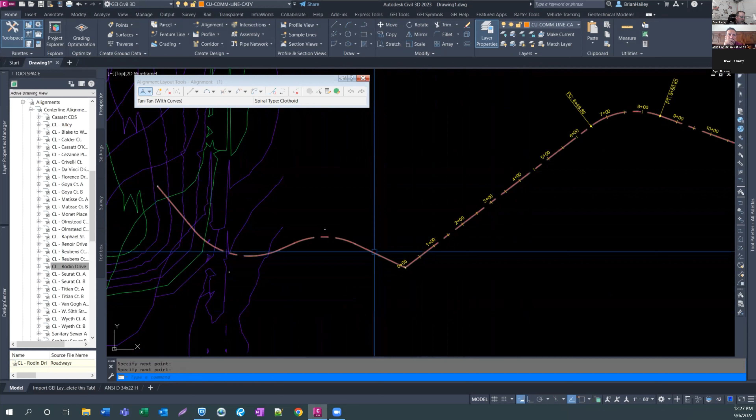For example, if I wanted to draw more alignment off the beginning of it, if I go tangent with curves and snap to that endpoint and pick, and pick, and pick, it didn't do anything - notice there's no stationing because this alignment segment is going up to the right, and this one is going up to the left. They're going in opposite directions, so it can't calculate the stationing. So if I undo that, and do it again starting over here and ending there, then the stationing is calculated.

Now, it didn't put a curve there, but you would just have to add that one in manually when you're done.

Is that a negative? Oh my gosh, sorry, I just had a bit of a heart attack. Well, yeah, because I added stuff to the left of the zero. I know, this wasn't a question about stationing on alignments. Jeez. A great example. And I invited you to join me? What was I thinking?

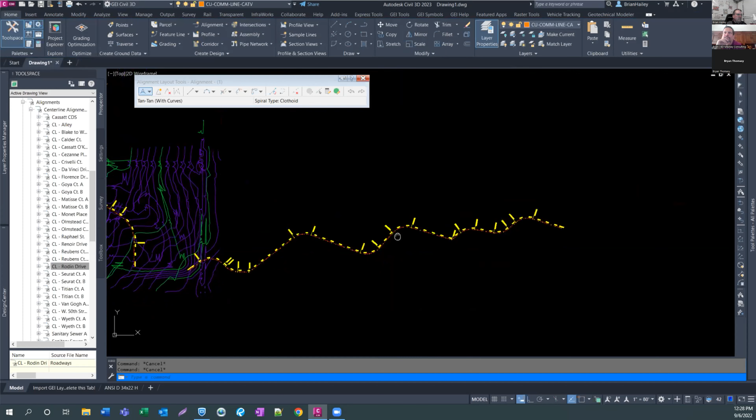So two things came up with that when you were doing it. One: drag the alignment into wherever you need, and then add PIs and fillet as needed. PIs, PIs, there you go. Yep, so I could say, oh I want to put 3 - I still have my blip mode on.

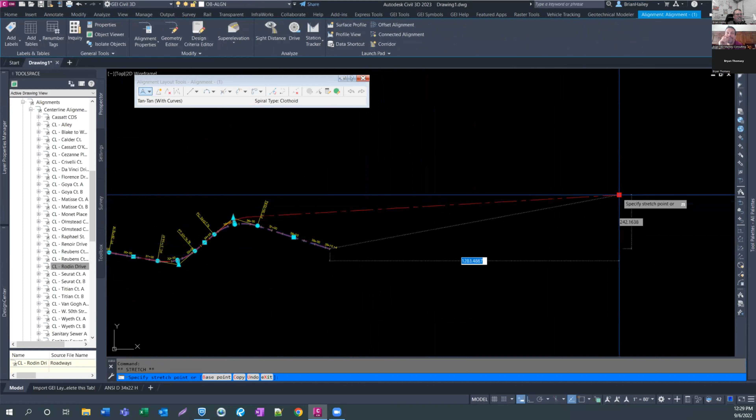I so know what I'm getting Brian for his birthday. All right, so basically you can say, oh, I want this to end there. And then you can just come in and insert PIs. So I use the insert PI and put down boom, boom, boom, boom, and then come in and fillet some curves in there. So yeah, that works as well.

If I needed curves between each one, I would do it the other way. I think it's a lot more efficient.

Can I add a word of warning? If you have a profile associated to this alignment, be very careful on how the pinning of that alignment is set up - the vertical alignment setup. If you have it set so it stays with the start of your alignment, I believe most of it's okay. But if you start adding and removing and you have the profile set such that it deletes entities as you move your alignment along, it will look at those PI points and it can delete spots in between them. So just something to be careful of.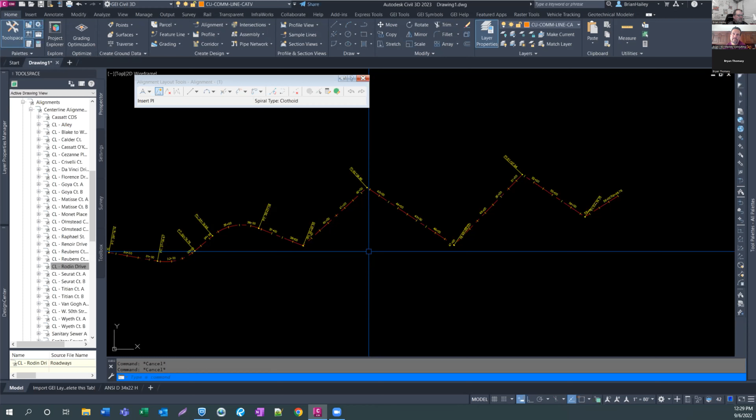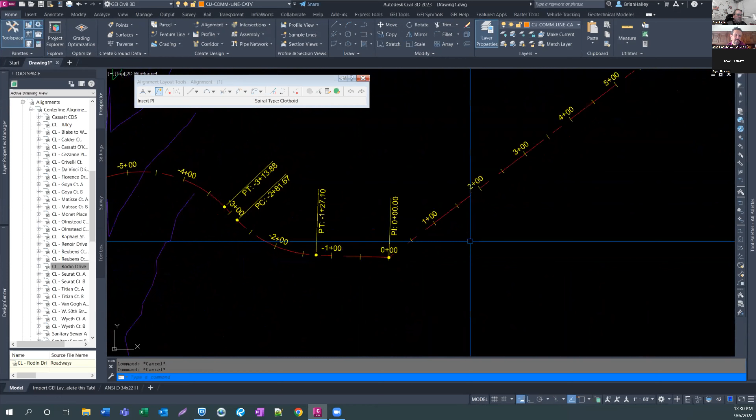And someone made a comment about your negative feet value there, asking does it start at 0,0 if you add to the beginning of the alignment? Yeah, so it doesn't - you can see it's negative here. If I add to the beginning of the alignment, it does keep this as 0,0, because that's where 0,0 was. So it's not going to change the stationing of the rest of the alignment. Because remember, you could have sample lines in here, and the sample lines are based off of the station value of the alignment, not the location in the drawing.

So if I were to add geometry to the beginning and it changed the stationing of the alignment, those sample lines would move. It's not going to do that for you automatically. You would have to go into the alignment properties, on the station control tab, and say, hey, I want my reference point now to be this beginning point, and I want that to be station 0.

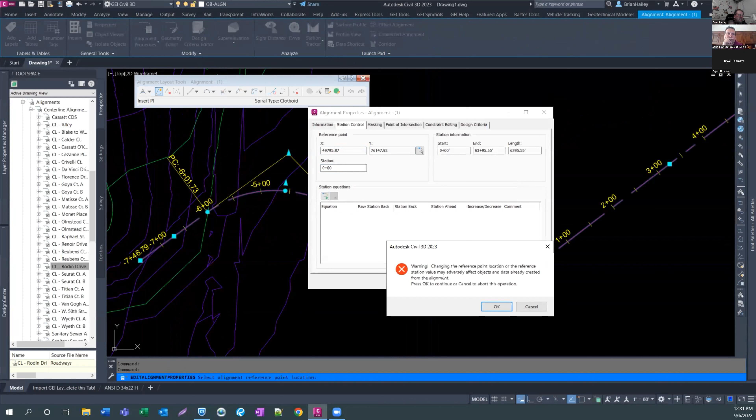Did you see that nastygram that popped up? Basically it's saying, if you're changing the stationing of your alignment, things that are based off of the station value will move. Are you sure you want to do that? So try to get your alignment as close as possible before doing those other things. But now if I hit OK, you can see...

It's now 0, 0 there. And you could also set it such that you don't start your station at 0. You can start it at like a 1+00 or 10+00 or whatever. Yeah, absolutely. That'll help a little bit along that line.

Then as you were showing that, there were some follow-up questions. One was talking about ARG files up in the chat—they load only once in the registry, so there were some comments on that. And then Tom Richardson asked, how do you address things stored in user roaming, such as working folders and profile.aws? So when you're talking about the customization stuff.

The way we handle our profiles is, you notice we have a version on ours. So the first time people launch the CAD using this profile, it gets loaded in, and now that is their profile. If I make a change on my system, it'll get copied to their system, but it's now just an ARG file on their system, and CAD doesn't care.

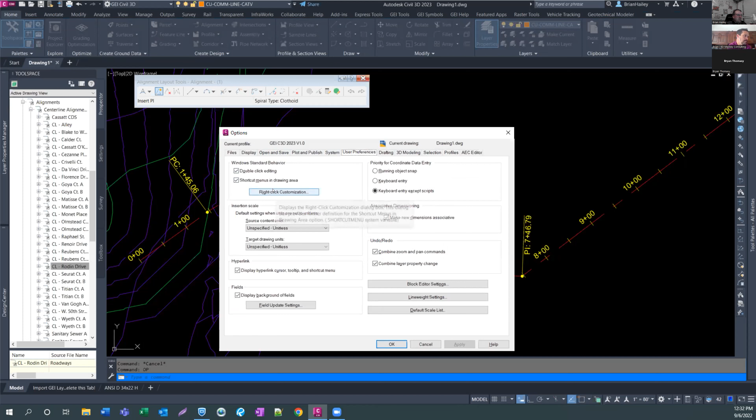So if I need to update the profile, which I try not to do, I'll give it a version 1.1 and have that be the active profile. Then when they launch it, it'll say, oh, I need to use that new ARG file, and it'll load that in. But the problem is it then changes all of their settings, like the selection stuff and user preferences on the right-click customization—it resets all that. That's why I try to minimize doing that, which is why I've gotten away from using tool palette groups, because I don't know how to update tool palette groups without updating the profile.

There's one last question, and it's basically yes or no. Did you get a chance to look at the Texas DOT alignment creation in Civil 3D when you only have stations, bearings, and degree of curve? I did not get a chance to look at that, Tom. Sorry. I figured that's what your answer was going to be, so I figured we could stick that in, even though we're past the bottom of the hour.

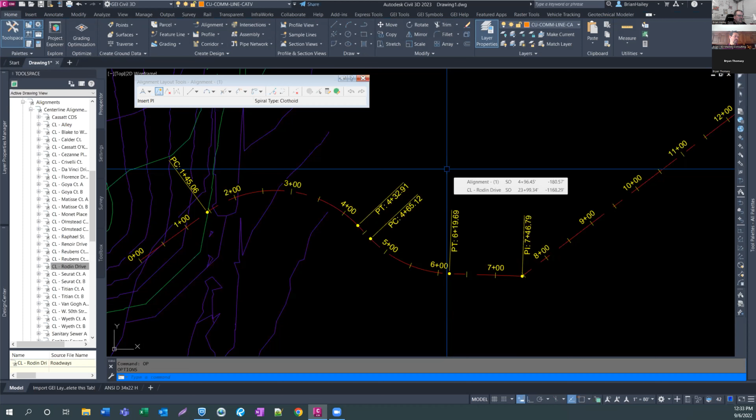Can I ask a question that we can start off with next time? It's something I deal with water people all the time—as they're going down station, they want to look backwards up, kind of walking backwards down station, and they want all their sections that way. So basically what you're saying is when you're standing at station 11, looking at station 12, you want positive values on the left instead of positive offsets on the right. Yeah, that's what you want? Yeah, we can talk about that. Thank you, just remind me, because I will forget.

I shall remind you. Beautiful. That's a great startup question. Oh yeah, there you go. Go ahead and type that one in, Brian, and put it on a sticky next to your monitor so you remember it for next month. Along with blip mode.